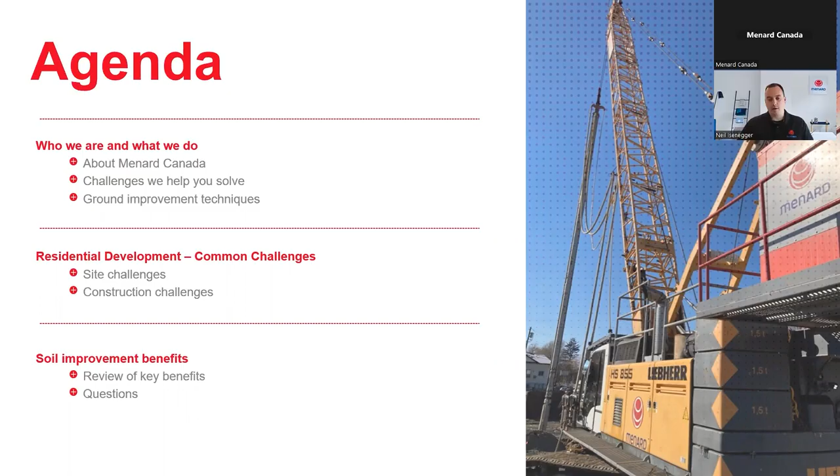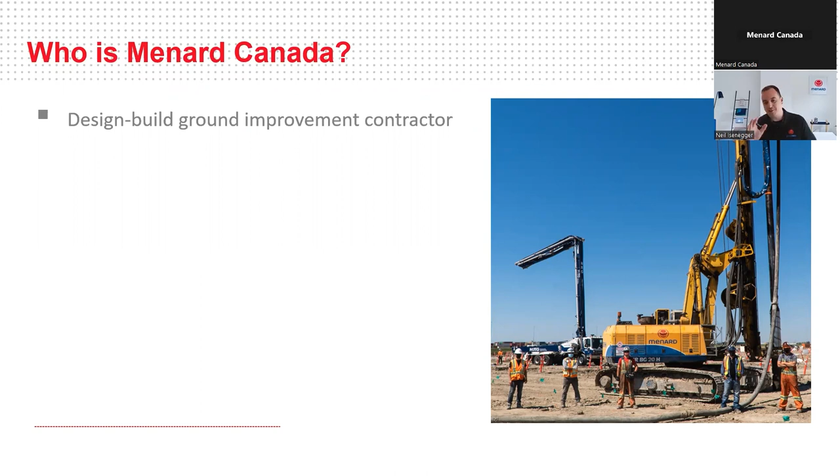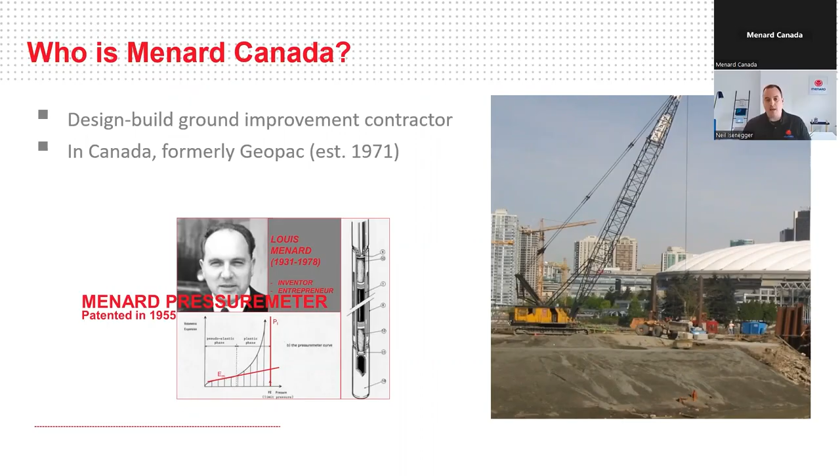So who is Menard Canada? We are a design build ground improvement contractor. If you don't really know what ground improvement is yet, don't worry, we'll get to that in a minute. We've been in Canada 52 plus years now. We formerly operated as Geopac, which was established in 1971 out of Quebec, and they were the first to bring the Menard pressure meter testing method to Canada, which allowed us to more accurately quantify poor soil conditions, how bad they are, get very good data, and look at alternate solutions.

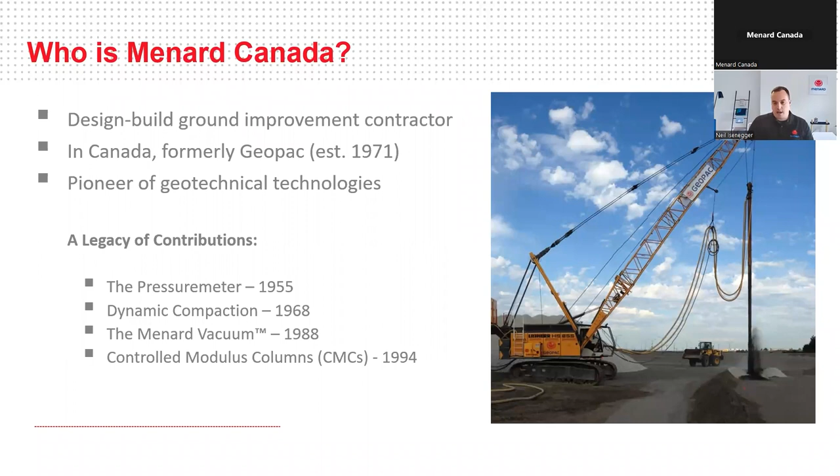...than your typical dig and replace, bulk excavation, and piling type approaches when you get on those sites. We brought a lot of really interesting technologies to the market in Canada. We mentioned the pressure meter. We were, of course, the first to bring in dynamic compaction in the 60s. Menard vacuum, which we won't really touch on today, came in the 80s, and then controlled modulus columns, which we'll end up spending a bit of time on today because it's a very versatile tool in the ground improvement toolkit that allows us to tackle a lot of different challenges.

Menard is established coast to coast across Canada, with offices in Vancouver, Kelowna, Calgary, Hamilton, two offices in Toronto, Ottawa, and Montreal, and we continue to grow. So we've got a lot of good, knowledgeable folks across the country that are able to help you. Please don't hesitate to reach out to them at any time if you have questions after this webinar—someone that may be local to where you're doing your business.

So Menard gets involved in a lot of different projects, and when I was setting up the slides for this webinar, I thought it was interesting that it's going to be a real residential focus for us. It's more about soil conditions than it is application—whether it's a 4-story or 8-story residential building, a storage tank, or an embankment for a new bridge or railway, that just tells us how much stress is going down on the soil. What we really focus on is what these soil conditions are and how we can manage them. But we will talk today about some of the specific soil conditions typical on residential projects, and how working with ground improvement helps simplify that process of construction, particularly in a residential environment.

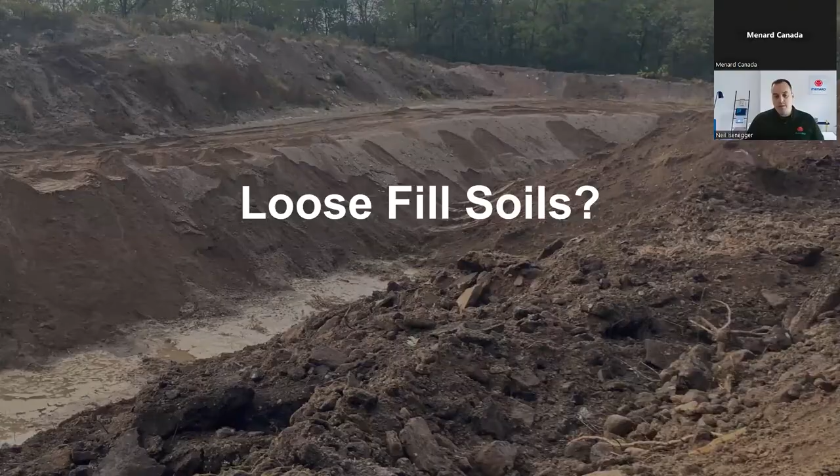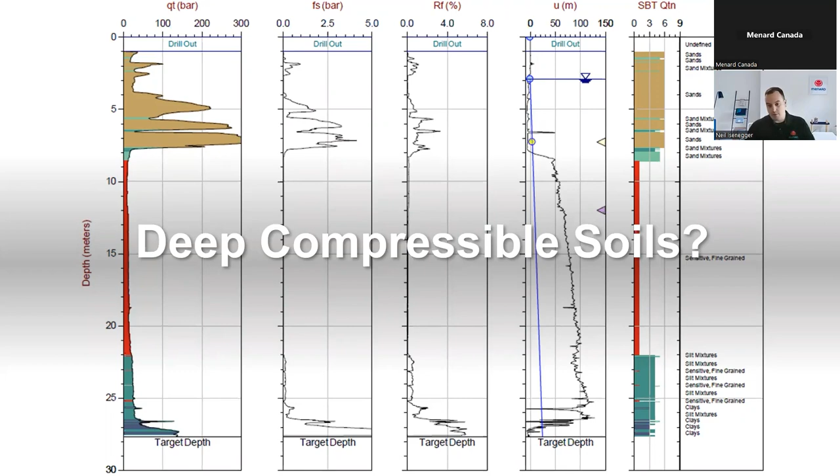These types of sites may have peats and organic soils. You've got to find options to get these buildings out of the ground that don't cost you a fortune and take the entire construction season to implement.

Typically, the options presented to you include things like bulk excavation. So you've got poor soils on the site, dig it out, replace it with engineered fill, bring in import of maybe granular material, sand and gravel, or maybe you're lucky enough to use common earth fill.

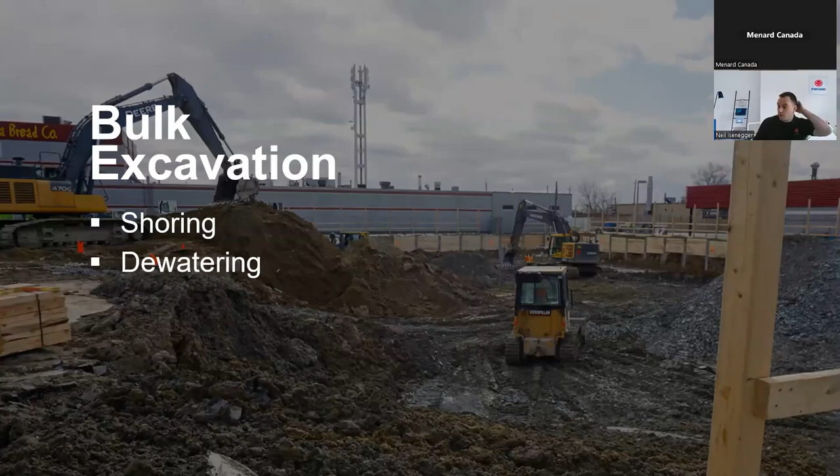Some of the challenges with this approach, depending on where you are on your site, a lot of these residential projects, particularly infill sites, are being built property line to property line. So to remove poor soils, you're likely getting into shoring. You may be getting below the groundwater table, and the soils may extend beyond that level, so you're getting into dewatering.

And then this results in soil disposal, which is costly trucking, and all of this has its associated embodied carbon as well. We'll talk a little bit about the embodied carbon aspects of construction, because I know it's becoming more and more prevalent.

The City of Toronto has recently announced that they're going to cap the embodied carbon on all new city-owned buildings. It's something Menard is working very closely together with our teams across the country to understand - what the embodied carbon of our systems is, how it compares to other systems, and to offer you good metrics on what you can expect in terms of tons equivalent of CO2 per building area, for example. We have an interesting paper coming out later this year that some of you may be interested in, so stay tuned for that.

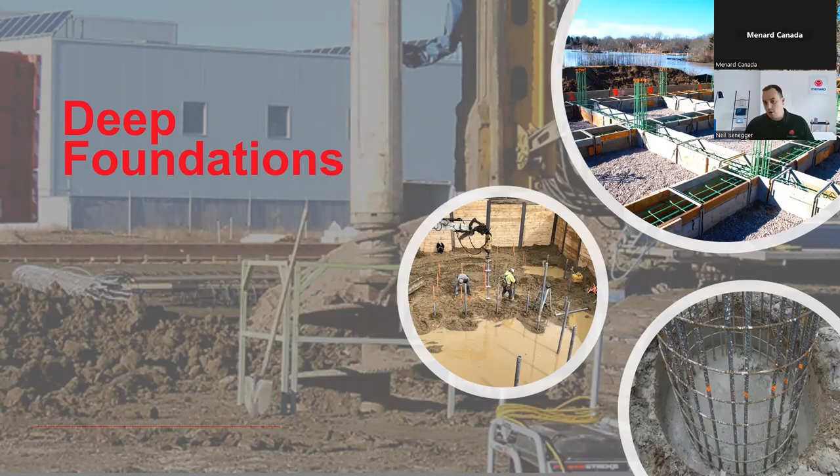The other option you're often given is deep foundations. Certainly with larger residential buildings, you might get into things like caissons or drilled shafts where you're pulling a lot of material out of the site, or it could be helical pile foundations, micro piles, things of this nature.

These are often fairly costly to install. They also require more costly structural systems - pile caps, grade beams, tie beams, structural floor slabs - which complicate and add to the expense of these projects. And then, as we're focusing on that embodied carbon, it's a real kick to the project from that standpoint.

Obviously, everyone would like to be at high capacity, shallow foundations - this is strip and spread footings. A number of reasons for that: they use less excavation required, so you're generating less excess soil to manage, fewer materials, so less concrete, less rebar.

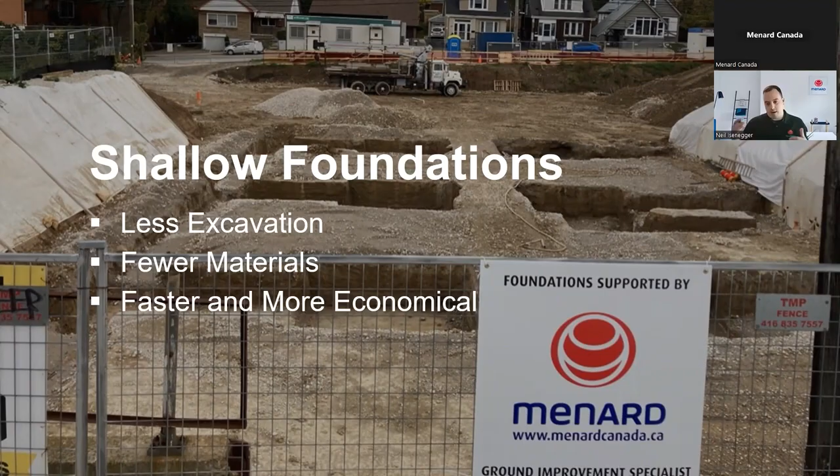These are often faster and more economical to construct in the field as well. Lots of folks are very familiar with this. As you get into pile caps and grade beams, you may need more sophisticated site trades to tie that rebar and do a good job of constructing those elements. And shallow foundations, of course, have a lower impact on the project in terms of carbon, emissions, and material use.

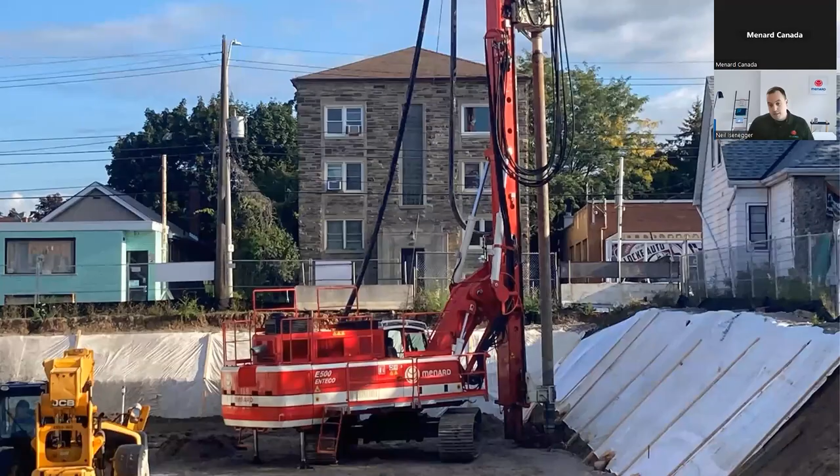So this is a site here you see in the background of this slide. You can get a sense of some of the size of these pad footings. This is a project that was completed a couple of years ago by the Menard team here in Hamilton. You can see ground improvement being installed very close to existing buildings, right next to an existing slope.

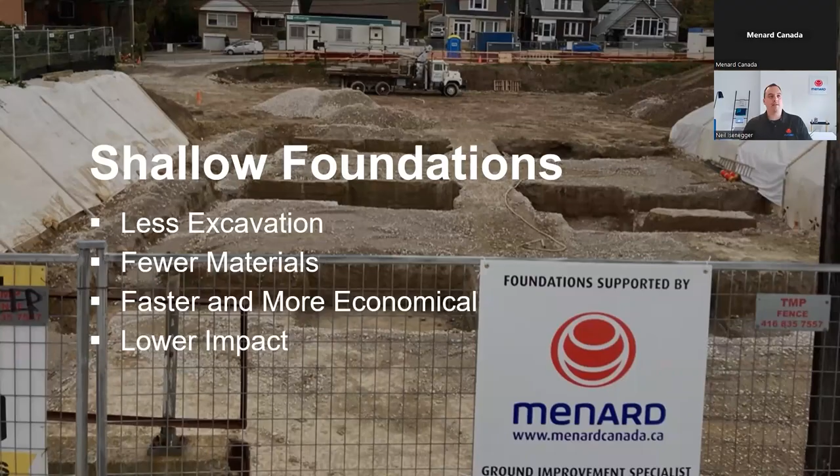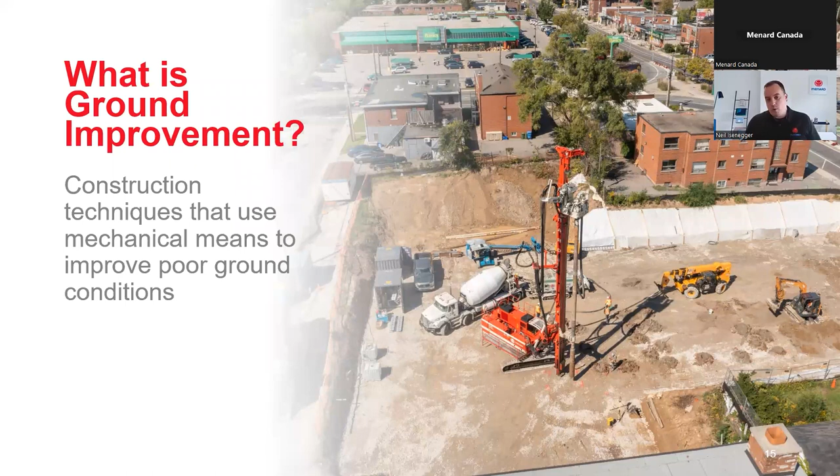So what is ground improvement, you might be asking? Ground improvement is sort of a catch-all name for a bunch of different technologies that use mechanical means to improve poor soil conditions. There's a bunch of different approaches that can be taken, sometimes in combination with each other, to make a site workable for construction - helping get you from dirt to doorstep with these residential developments.

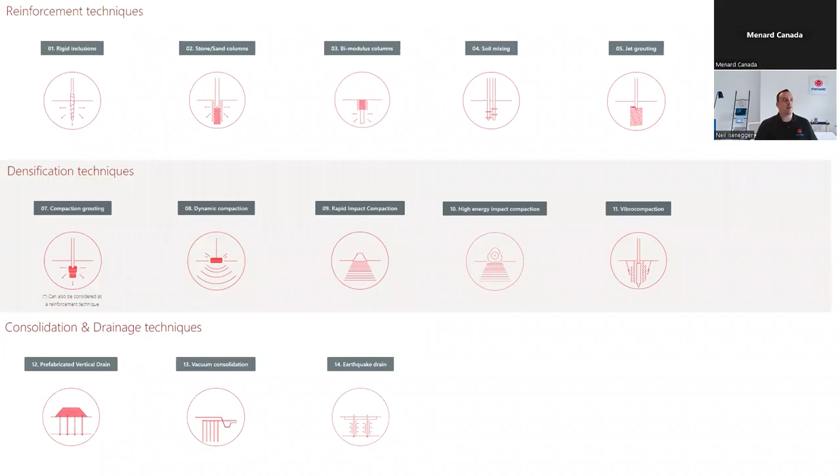Some of the more common techniques that we're seeing in Canada and utilizing on projects include soil densification - the number of different ways we apply either impact energy or vibratory energy to the soil to densify it, tighten the site up, give it higher bearing capacity, control settlements, and manage liquefaction risk. Our team on the West Coast is certainly dealing with a lot of liquefaction-related vibro compaction, for example, which is what you see on the far right here.

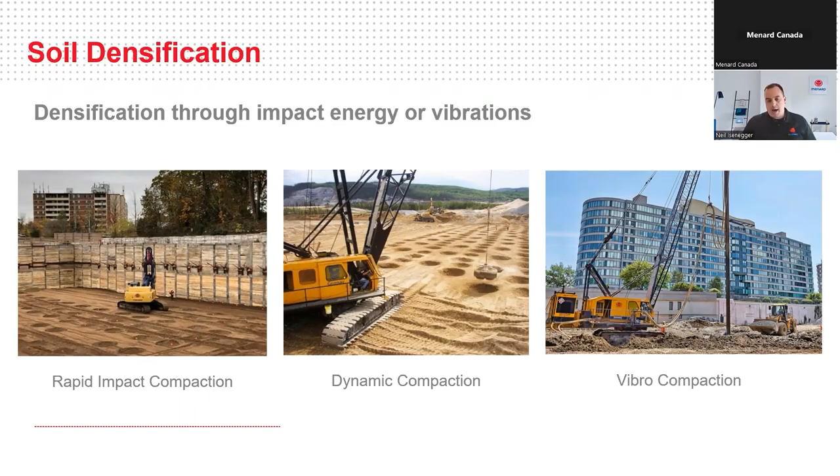With these techniques, you're generally not adding any materials to the site. You're simply using energy to densify the soils. That works up to a certain limit. Beyond those limits, you start adding materials into the process.

You can use aggregate as a somewhat common approach. You can see here a number of different installation methods for installing a vibro stone column or an aggregate pier - techniques suitable for treating 30 meters, 100 feet of poor soils, maybe 15 meters, and then smaller equipment for smaller projects. The goal here is to bring the right piece of equipment to a job site, no bigger than you need, from a number of standpoints - obviously costs, but in terms of its environmental impact as well.

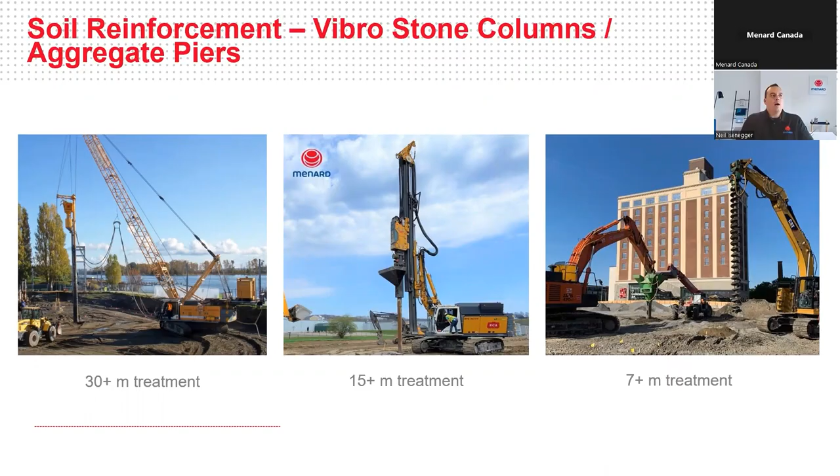There are certainly some limitations when you get into aggregate-based ground improvement, and a lot of those can be overcome with concrete-based ground improvement methods - controlled modulus columns. You see again a number of different sizes and setups of equipment, everything from very large rigs that go 30 meters plus on sites, to more mobile rigs in the 20-meter range, 15-meter range, and it gets smaller and smaller from there.

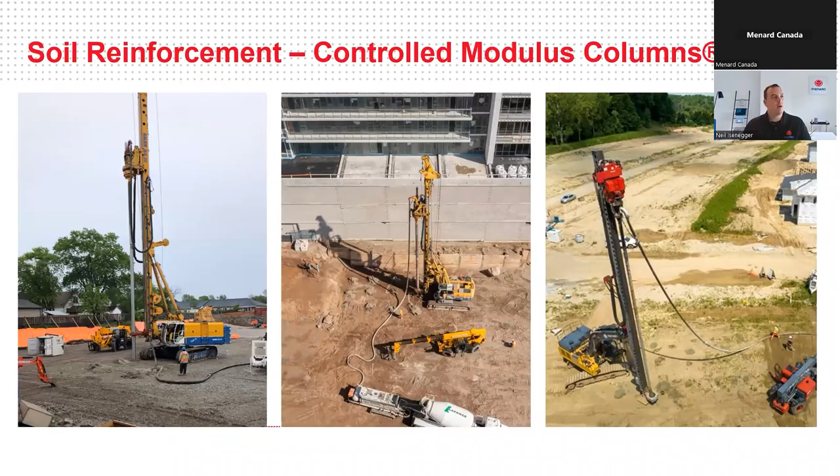Why would you even start the conversation of considering ground improvement? Well, when you're dealing with challenging soils on your site, really what your main concern is settlement - total settlement of buildings, roadways, services, and differential settlement within structures causing cracking, and all sorts of issues associated with that. Ground improvement is an engineered settlement control system. That's where it all starts - it starts with settlement performance, and then the structural systems back out of that.

We're able to increase the bearing capacity of a site. You might have a site where your geotechnical engineer won't provide any bearing capacity because you're in undocumented fill or very poor soils. We can work that site, give you reasonably high bearing capacities to build off of, and help manage long-term deformation - because certainly you can put a structure up, but 10, 15, 20 years down the line, how is it performing? And then in seismic events there are risks that the soils may liquefy and cause settlement of structures, and there are ways we work to mitigate that as well.

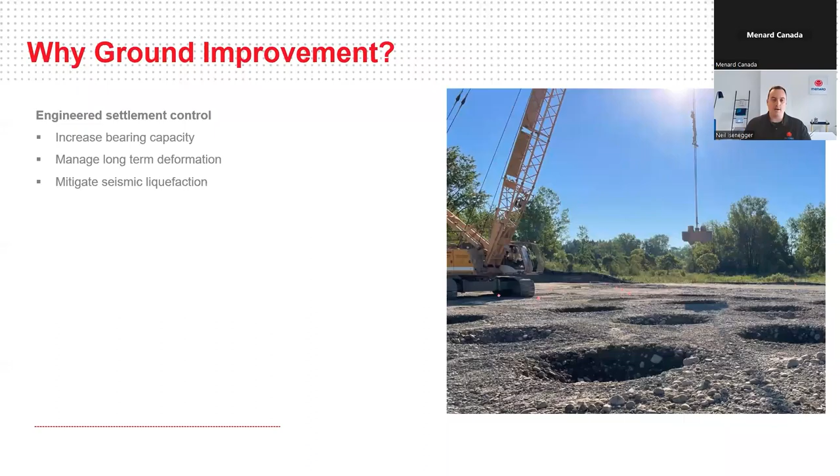From a construction standpoint, I think one of the main reasons our clients like working with ground improvement is it simplifies the construction process. We're significantly reducing the amount of excess soil handling and disposal that needs to be done. So if you've got 2-3 meters of undocumented fill on site and you need to find a home for that, it's becoming more difficult to relocate those soils. Certainly here in Ontario with the latest excess soil regulations, that's complicating things. If you can leave it in place, densify and reinforce it, there are significant reductions.

Going back to standard foundations and floor slabs - these also move faster in the field because they're easier to construct and have less materials. Some of the other benefits: if you're building a residential townhome or single family home, the end user may decide one day they don't like where you put the bathroom - maybe they want it on the other side of the house, or want to move some servicing around. If you're in a structural floor slab system, that's very difficult to do. Ground improvement, allowing for standard floor slabs in those cases, gives a lot more flexibility for future modifications to these structures.

And then, of course, there's time and cost associated with every kind of technique. Some of these big bulk excavation and earthworks operations take a lot of time and cost a lot of money, and you can be a lot faster and more economical, often with ground improvement techniques.

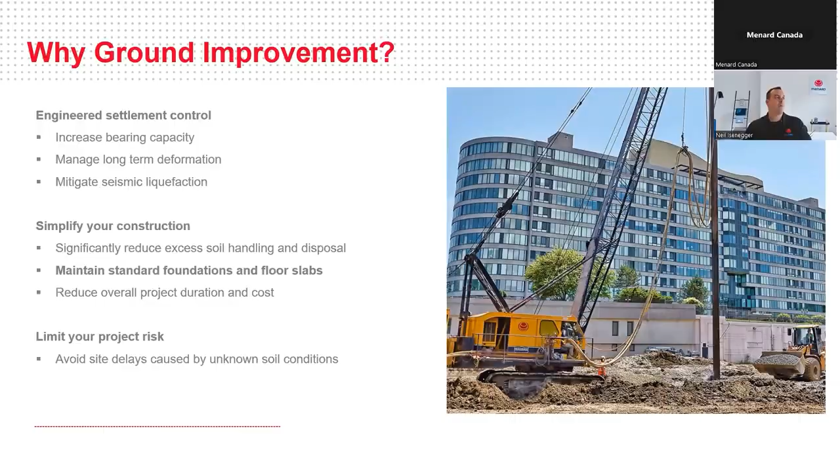So a bit of an overview - we'll dive into some residential developments, and then some of the common challenges that our clients are often faced with, and that we help them out with.

When it comes to residential, this might not be the exact right headings for all these types of projects, because we'll talk about subdivisions and low rise, and technically they're all low rise developments, but they are a little bit different in how they're executed.

Subdivisions, whether single family homes or townhomes, are often large sites in terms of area, and then have relatively light structures placed on them. But when you have soil challenges on large sites like this, the costs and duration start to escalate because you're dealing with such a large area.

Digging up a meter of coarse soils on an infill site downtown may not be a huge impact to the site, but digging a meter off a large development area is going to start generating a lot of soils, take a lot of time, and certainly be a lot costly. So with subdivisions, that's one of the main differences from other developments - just the actual area these projects are on.

They also often include a lot of things like roadways, a lot more utilities and servicing than what you're dealing with on maybe a couple low rise or mid rise developments on the project.

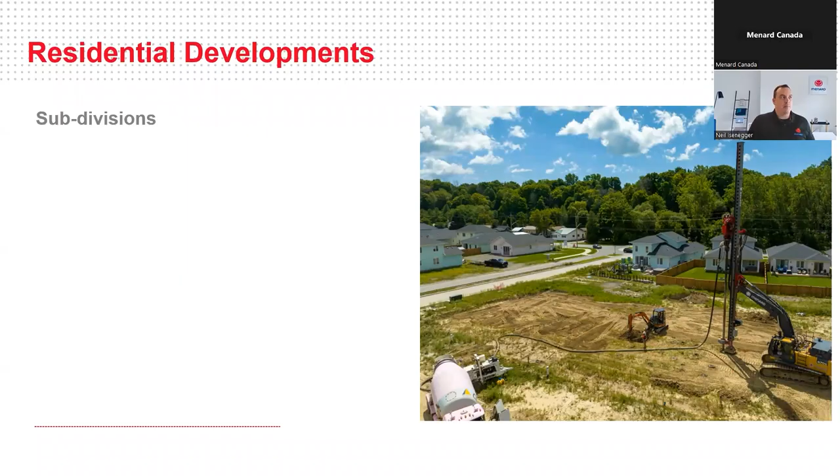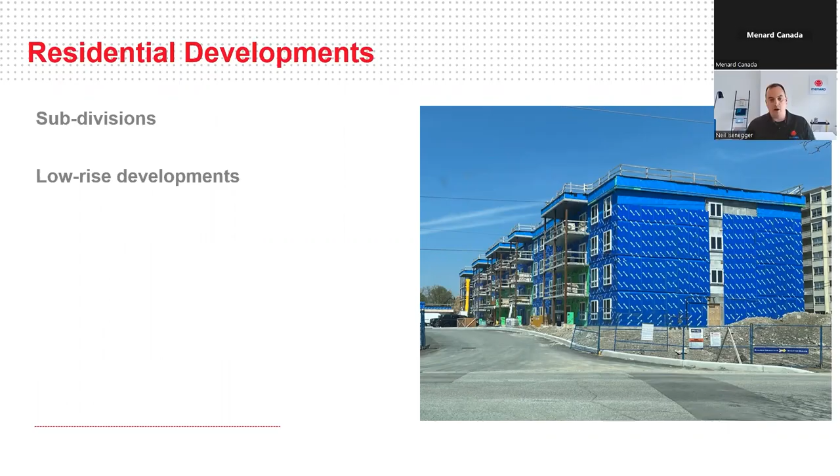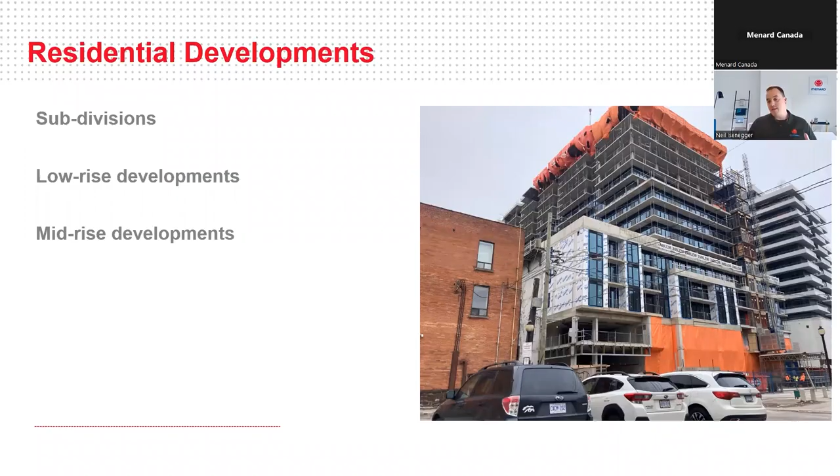As you get into mid-rise developments - and all these photos are projects supported by Menard - you get a lot more stress. Typically smaller areas means you need that high bearing capacity to control settlement and make your foundations work. As the number of stories increases, we might be moving away from strip and spread footings, possibly into raft foundations, depending on soil conditions. So there's a distinct difference between mid-rise and low-rise development.

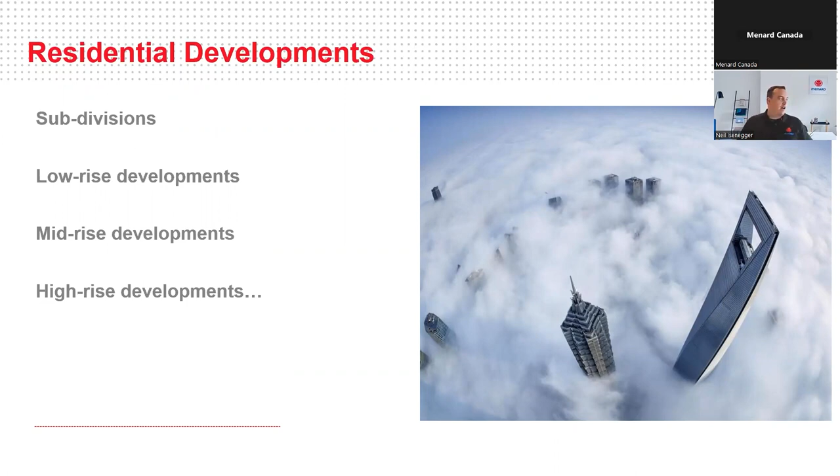Then high-rise - if you're developing a lot of high rise, anything over like 20-25 stories, you might be in the wrong webinar. Ground improvement, it's not piles - we're not doing the 55-story towers downtown Vancouver, downtown Montreal, downtown Toronto. Really, we're focusing on this low to mid-rise development where we can offer a lot of value, and these techniques seem to work quite well.

So what are some of the common challenges on residential development? Besides permits and approvals, labor shortages, material shortages, pandemics, and all the other challenges folks have to deal with, a lot of these sites being developed - maybe they're leftover sites, maybe they're leftover sites for a reason.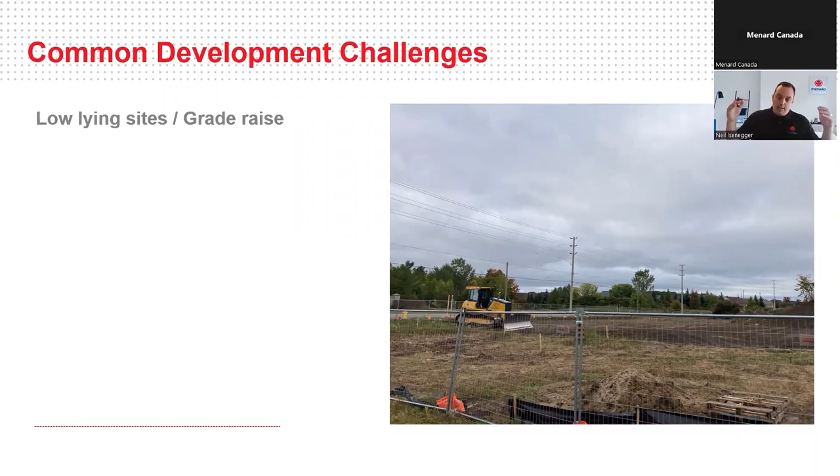They may be low-lying sites. They may require additional fill material, a grade raise placed to get them up to their final elevations to manage civil requirements, drainage, servicing. That placement of new load on the site can be a challenge, and we'll talk about some examples of that in a minute.

Brownfield sites - there's been former land uses, and these may have impacted soils. We'll talk about some techniques for dealing specifically with brownfield sites.

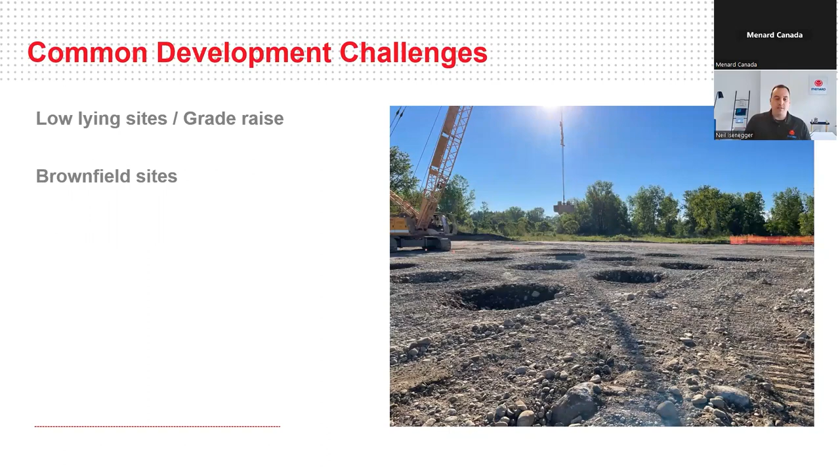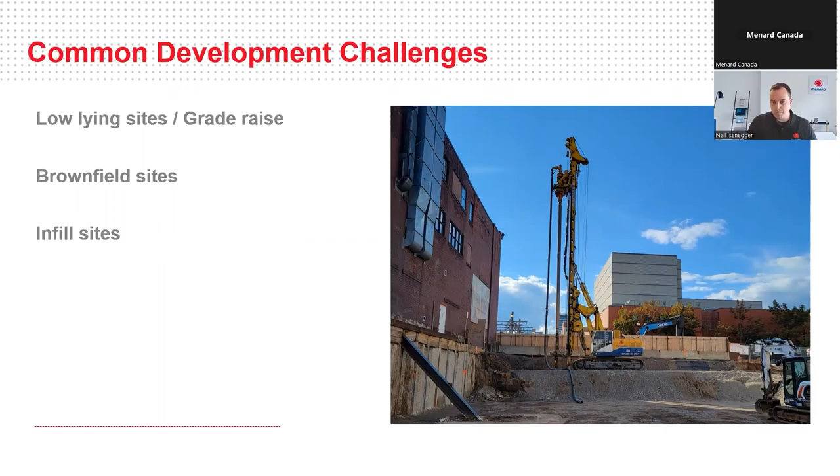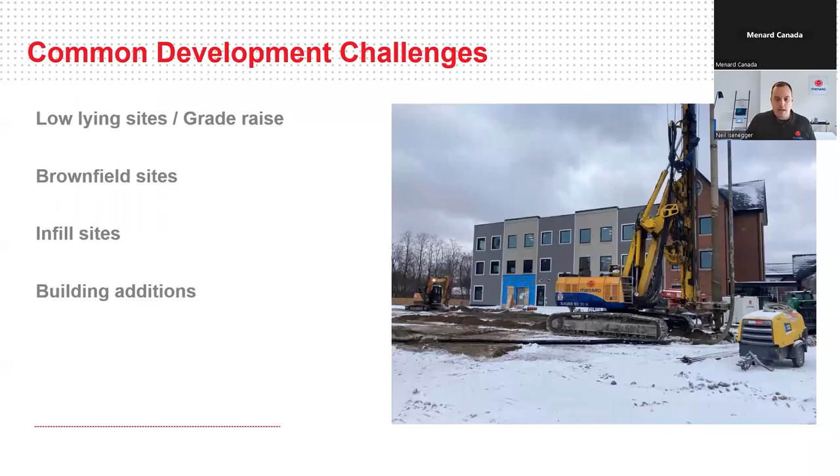Infill sites are another type of development. A lot of this is common, but what's changing is the environment you're in. We've got some interesting comments particularly on infill sites, and how to manage that without upsetting your neighbors, which is really the same as building addition projects as well, which we do a number of.

This can complicate your site. It can complicate where you want to put your foundations. It can complicate what you need to do in terms of earthworks to actually make the site buildable. There are ground improvement strategies that can help manage high groundwater conditions. And then the other one we mentioned previously is seismic liquefaction - earthquake events shaking the ground, losing its strength, and causing settlement of these structures.

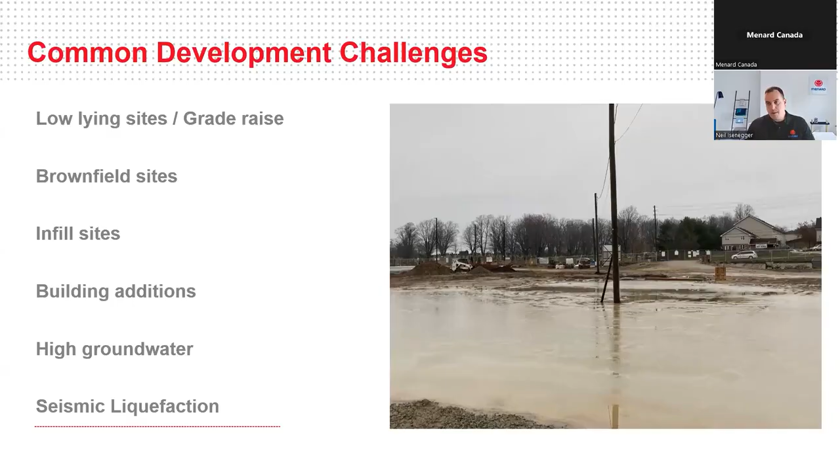So one example of a project completed by our team out west - this one's in Kelowna, BC. It's a large mixed-use residential development, also had some cool stuff going on with it in terms of boat storage facilities and clubhouses for this boat club. But the site had 20 meters of loose sands that were at risk of liquefying during earthquake events.

It also had low capacity, and you can see here vibro compaction being used to densify that soil, mitigate that liquefaction risk, and provide a higher bearing capacity - shrinking down the footings, sticking with standard foundations, and helping to get that site up out of the ground without the expense of driven piles, pile caps, grade beams, and structural slabs.

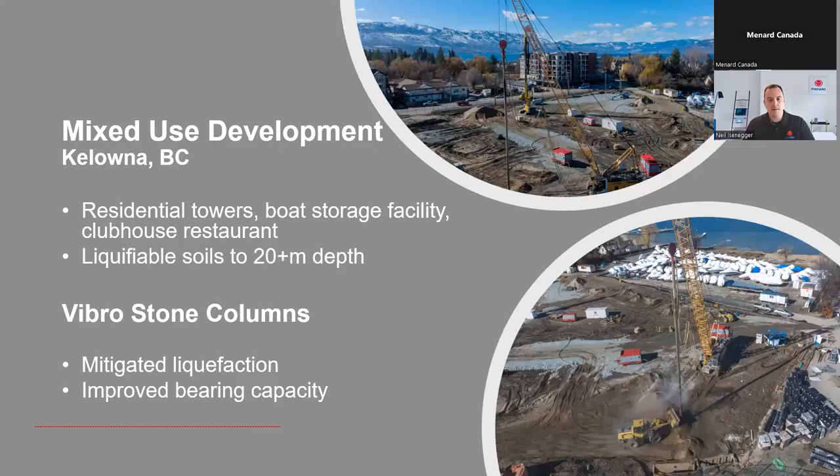We mentioned already with subdivisions, these are typically lighter structures. They often have the intent to have minimal foundation requirements - production units, trench and pour techniques, for example. Folks really like that, where they can get the foundations in as fast as possible. And they really prefer conventional floor slabs, as we talked about, in terms of the ease for future modification, but of course also the cost of installation.

These sites, having a lot of site servicing and roadways as well, often lend themselves to ground improvement techniques that can allow you to globally treat a site. We mentioned techniques like aggregate-based techniques and concrete-based techniques - those are most commonly installed discretely underneath foundation elements, underneath slab elements. But techniques like dynamic compaction, vibro compaction, another technique we'll mention here in a minute, allow you to treat the entire site. So you're not only dealing with the foundations and the floor slab, but you're dealing with the driveway and the backyard and the servicing that's coming into the building and the long-term performance of the roadways. And that can be very effective on these kinds of larger sites that may have larger earthworks operations.

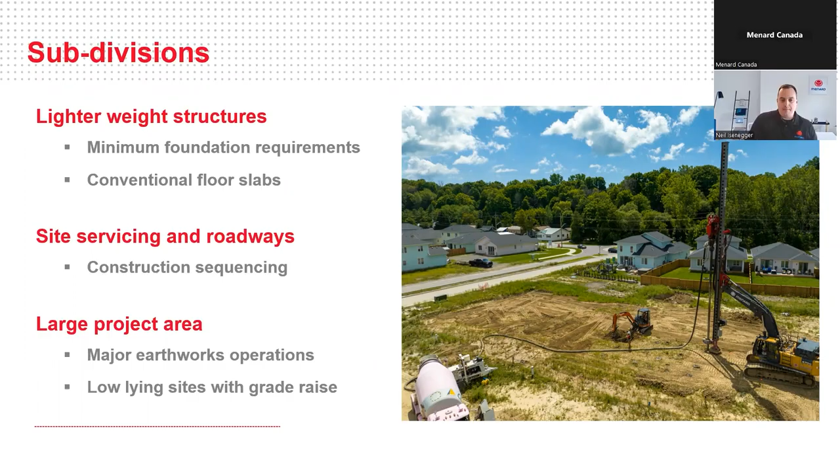So this would be an example here of this discrete support, like we talked about. There are a number of projects we're completing all across Canada that are single-family homes, townhomes. We do a lot of this work with concrete-based systems because they're generally the fastest to install and the lowest cost compared to say aggregate piers.

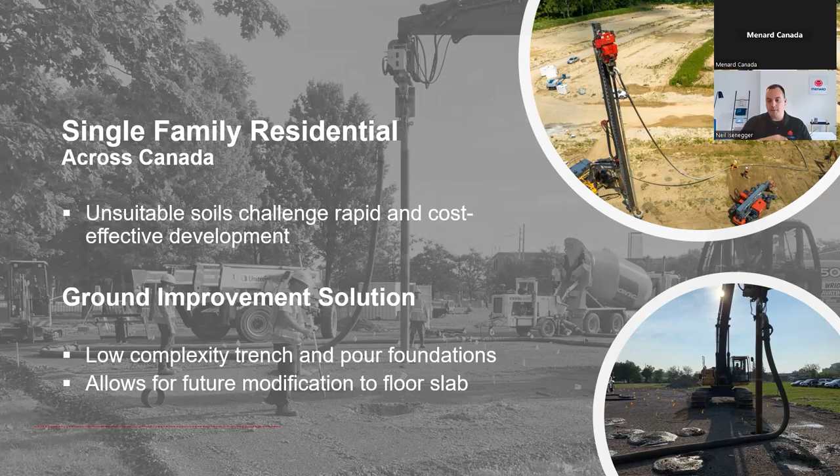We're often in situations where maybe some of the vibrations associated with dynamic compaction might not be suitable when you're in residential neighborhoods. These techniques are very low to no vibration, so keeping your neighbors happy, not damaging existing structures that may be next door - pools, existing buildings. And then they allow again for that low complexity trench and pour foundation system. So a lot of work with controlled modulus columns, using a bunch of different setups, as you see here, from very small equipment to larger equipment to manage these types of projects.

This particular site - this is a subdivision in Keswick, Ontario, and for those who don't know the area, it's just south of Lake Simcoe, but it's very soft soil conditions. The area is known for very poor soil conditions and having issues with long-term settlements. The developer was looking to build a number of single-family homes, and 17 units were being placed on this site, but they were challenged with about 20 meters of deep compressible clays. The concern there is that you put the foundations, you put these houses up, and then as the years go by, you start to get shifting and settling of the buildings, and they become unsuitable for occupancy.

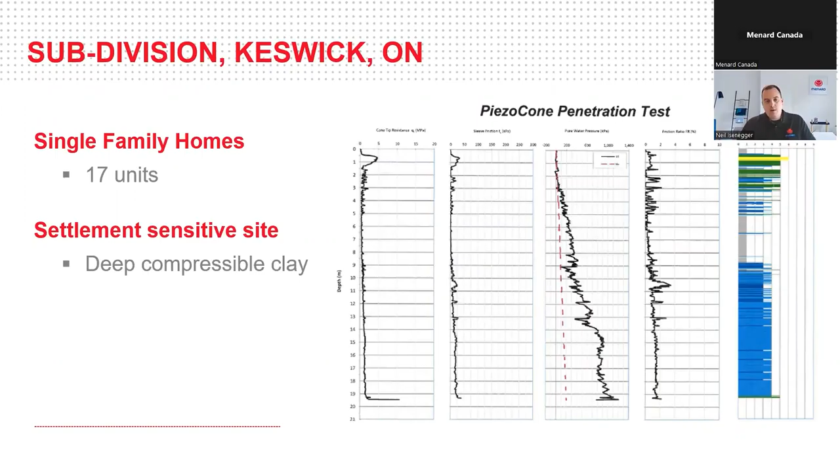We took a pretty interesting approach on this site using a combination of what we call wick drains and preloading. I'll show you an animation of this in a second, which I think will give a lot of context. But the idea here is that when you're placing new load on compressible clays, that settlement happens over time because the water within that soil goes under pressure under new load. And as that pressure dissipates, the settlement occurs.

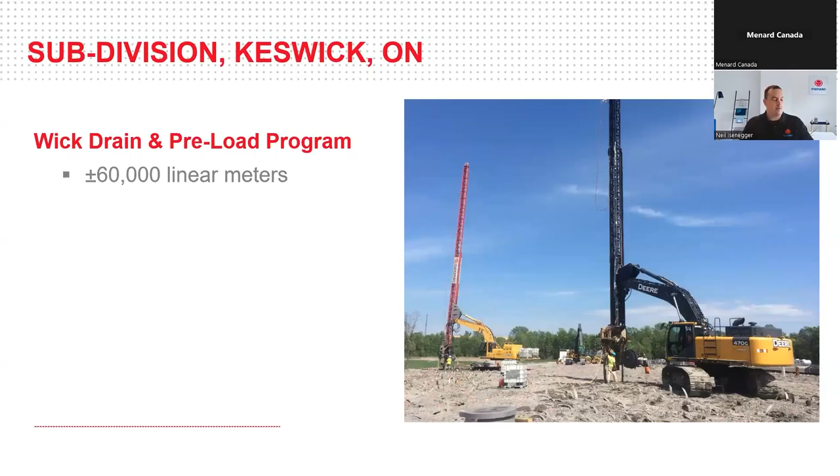So if you can dissipate the pressure rapidly, say in 2-3 months, you can avoid the risk of long-term settlement. This site used about 60,000 linear meters of vertical drains to relieve the pressure, and then placed anywhere from 2 to 3 meters of new fill over top of these units, so that the weight of that new fill was driving out that settlement in a matter of a couple months. It was then able to be removed, and the houses were put down afterwards, and are performing very well today.

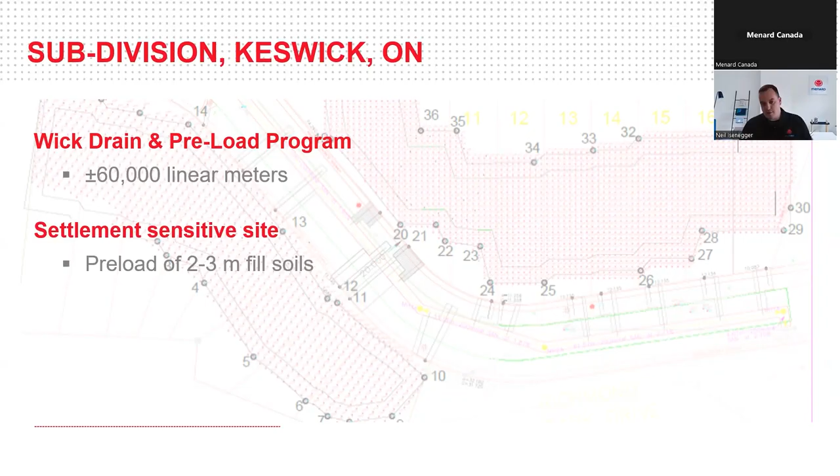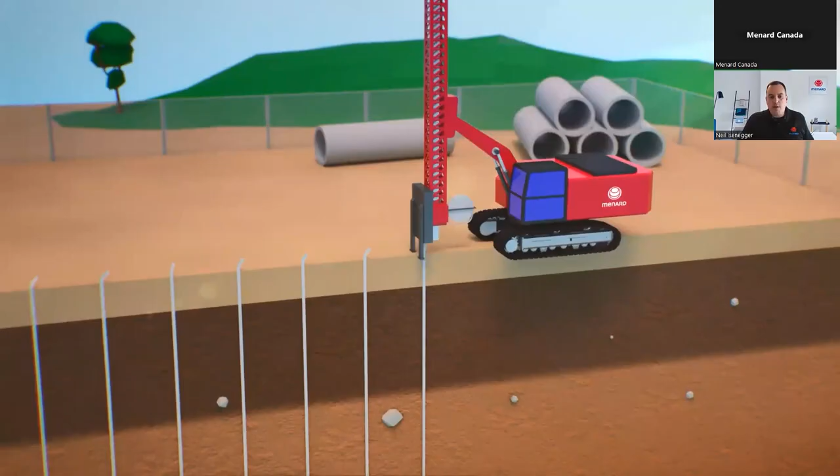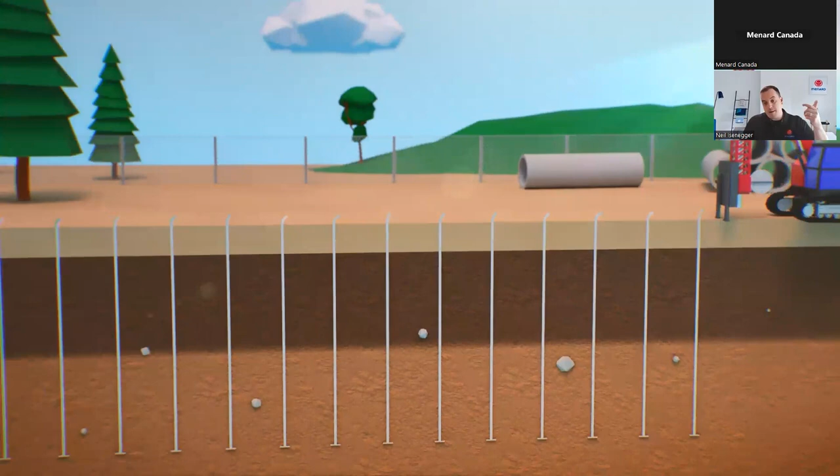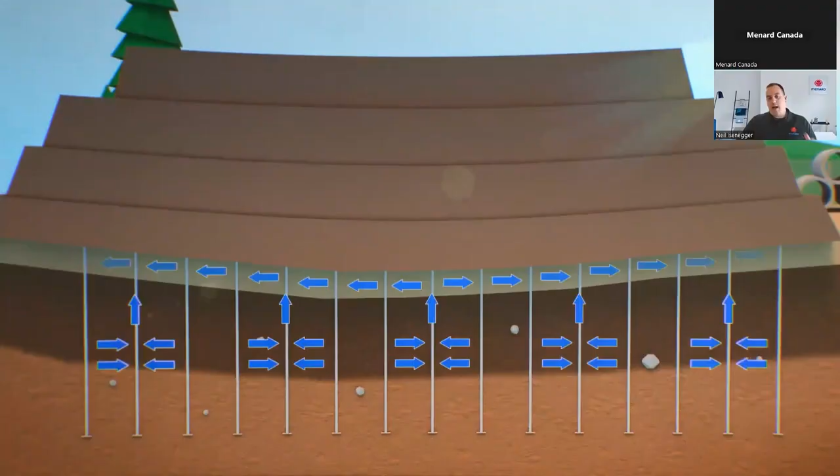So this is a quick animation of the process. I hope it's not too choppy coming through virtually here, but what you can see is a high mast excavator rig stitching in these drainage elements. They're prefabricated - like a plastic core wrapped in a filter fabric. And then as you place the new load, that spacing of the drains allows for the rapid relief of the buildup of pore pressure and causes that settlement to occur rapidly, as opposed to years or decades down the line. That can be incredibly cost effective.

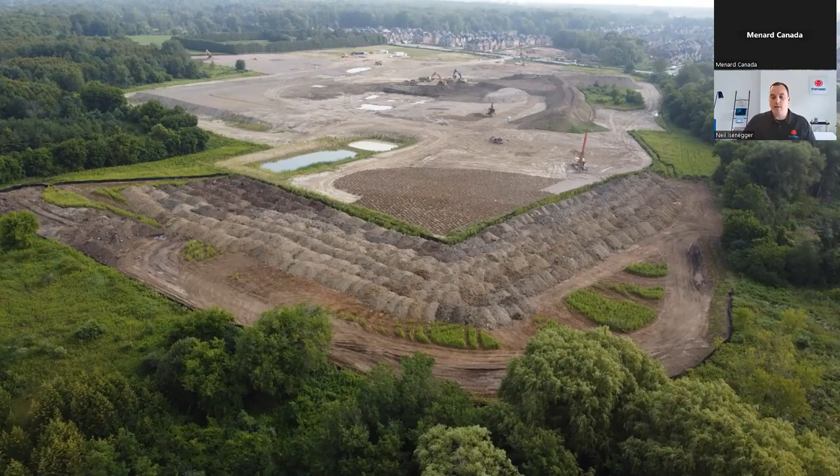When it comes to brownfield sites, I think the most common challenge is, what was there before and what did they do with the property? There could be fills that were placed in an uncontrolled or at least undocumented manner. There may be environmental contamination. There may be concerns about buried artifacts on the site, whether it's tanks, old foundations, etc., that you may or may not be aware of. All of this typically means you're doing a fair bit of earthworks and remediation work to get the site ready. You're likely generating a bunch of soil that's unsuitable for reuse as backfill, and it may be quite costly to remove from site. All of that has a real impact on the project schedule, cost, and duration.

So if you can take those sites and de-risk the underground with dynamic compaction, as we're showing here in the photo, vibratory compaction, aggregate piers, or controlled modulus columns, fix the site before you develop, find and manage any of those issues without putting shovels in the ground, you can really get ahead on these sites. When you start digging, you often start finding a lot of problems, and the more you have to dig, the more problems you're liable to find. So we like to minimize the amount of soil you need to manage, minimize the digging - only dig as much as you have to - and get these sites built so they can get to market.

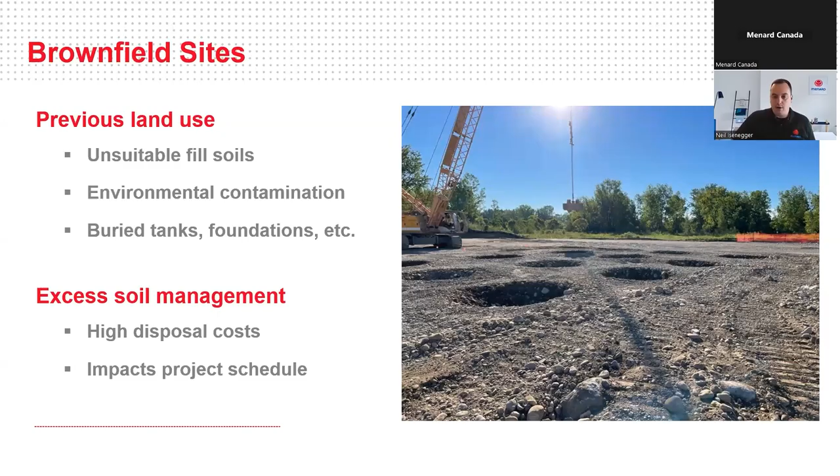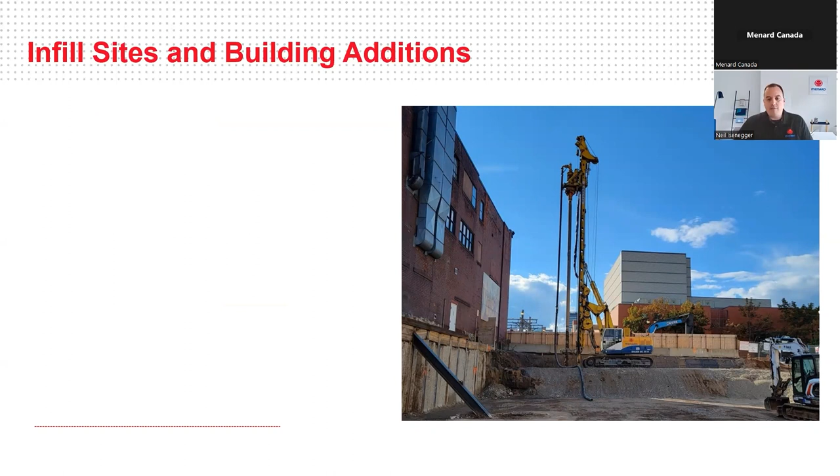We kind of combine infill sites and building additions because they have some very similar challenges. Often what we find on these sites is it's really about access and tight working conditions. They might have minimal material storage, for example, and using the right type of equipment makes a lot of sense. Here we show a concrete-based controlled modulus column ground improvement system where the material is being brought in every half hour, every hour, in a concrete truck. So it comes, it offloads, and it leaves. We're not having to stockpile 1,000 cubic meters of gravel somewhere to keep up with production for, say, aggregate piers.

You're definitely next to existing buildings, so you're not going to do dynamic compaction - the vibration levels are going to be too high. So using systems like controlled modulus columns that have no vibration, are relatively quiet, and require minimal material storage can be a real winner on these sites. And of course, being zero vibration, they have very little impact on adjacent structures and shoring, for example, as well - we'll talk about the building in the background here in a second.

And then vibrations - we mentioned vibrations. There's two types really, the way I see it: damaging vibrations, and then perceived vibrations. The human body is very receptive to vibrations. A lot of neighbors in the community, when they feel vibrations, start thinking the worst about their foundations and their property. Whether what you're doing on site is actually going to cause issues or not, that perceived issue results in a lot of complaints, taking time away from your site super who has to deal with these people and their concerns.

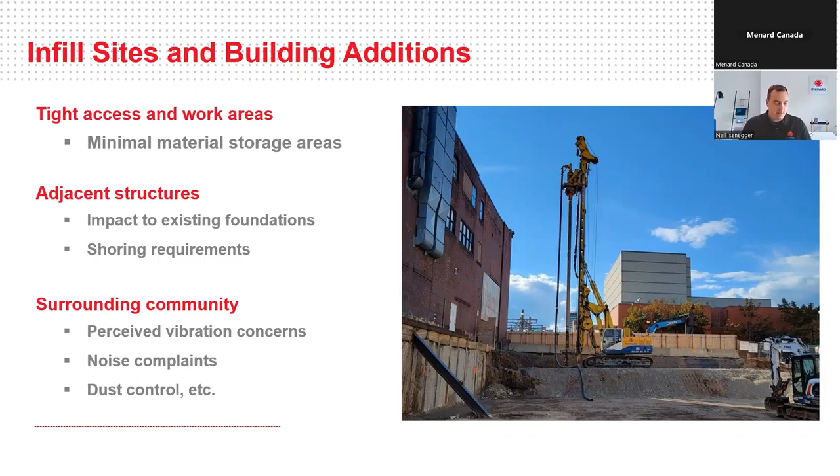One of these sites is the 15-story mixed-use building here where I am in Hamilton. This site had maybe 5 to 8 meters of impacted fill, weak native soils, high groundwater conditions. There's an adjacent historic structure, a new building on the other side - a lot of challenges in that regard.

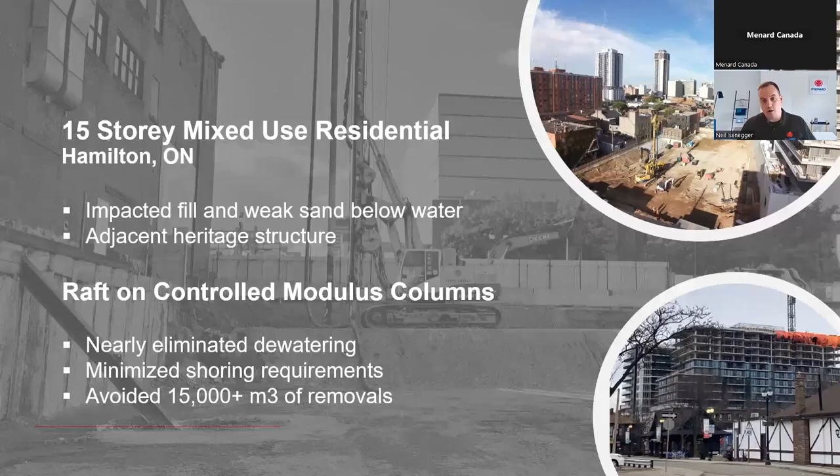Controlled modulus columns on this site were used to support the development. They were installed right up against the heritage building without any issue, and greatly reduced the requirements for shoring. If you cut 5 to 8 meters of shoring off your site, plus removal of all that spoil and the dewatering, that's significant time and cost to the project - eliminated by reinforcing the soil from the underside of what was a raft foundation without ever getting in. We stayed about half a meter above the groundwater at all times.

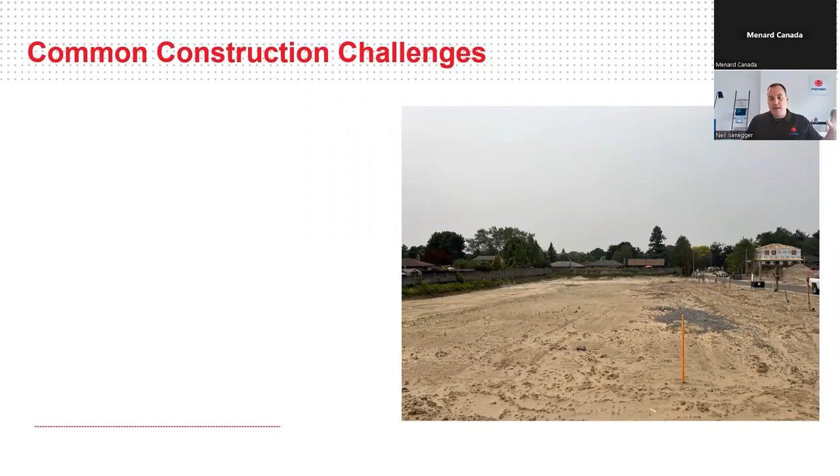So talking about some common construction challenges now - those are the site-related challenges. We're all familiar with the soil-related challenges, but when you actually get up to construction, what we like to work with our clients on is things like sequencing of work.

Especially if you're on a low-lying site that might have compressible soils and you need to raise grade, that grade raise is going to cause settlement. When do you put in your utilities? When do you put in your roadways? When do you do the ground improvement work? When do you do the grade raise? Do you do the grade raise first and then reinforce it after, or do you do the ground improvement first and support the grade raise directly?

A lot of this conversation is really about working with the clients, understanding the schedule and the objectives of the project, because every project's a little bit different. Some folks have time to wait, and when you have time to wait, you might have more options available to you. Sometimes folks need to just build - they need the ground improvement done, want a forming crew coming in a few days later - and that changes how we might approach a project.

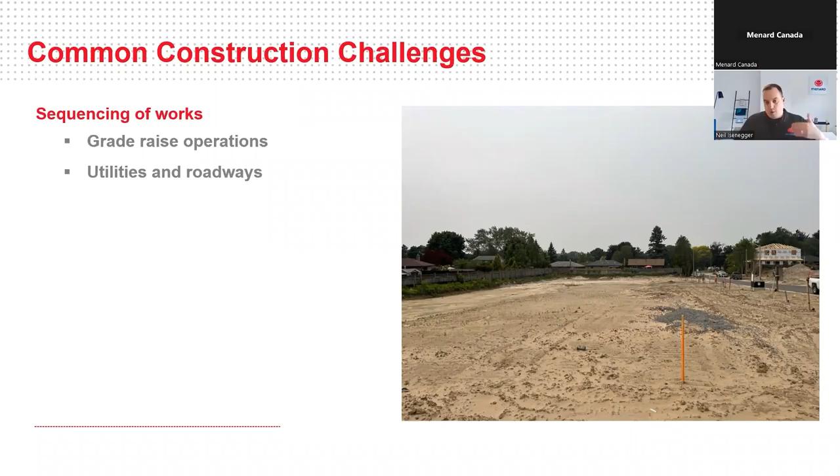Things like vertical wick drains, like we showed earlier, do require some time to consolidate that site and drive that settlement out. That may not be applicable if you don't have the time to wait, and you might get more into soil reinforcement with aggregate, or most commonly with concrete, to support grade raise directly, support utilities directly, in foundations.

Schedule certainty is a big challenge - this is about delays. When you have unknown conditions on site and you start digging, and if your plan is bulk excavation, there's a lot of unknowns. Those unknowns may result in extra cost, because if you're moving more volume of soil off site than anticipated, there's obviously a cost to that. But then there's also a duration to that - not just the duration of the earthworks, but what that extended duration does to the rest of the project.

You delay a project by 2, 3, 4 weeks, maybe managing poor soil conditions, and that falls all the way down the line on your schedule when you're trying to line up trades closely together so you can get your projects out of the ground as fast as possible. This can cause major hangups. Of course, when you start digging and get into groundwater conditions that are unmanaged, that's major delays to the schedule.

And that goes all the way down the line, to the person at the end of the day who might be putting on the doorknobs and installing windows, who maybe planned for your project for a certain time and now it's being pushed out. Maybe they do or do not have the capacity to manage it at that time, and it really complicates the process. Dealing with that up front with ground improvement, reinforcing the site so that when you get down to the founding elevation, you're just putting your footings in, that can save a lot of headache on the duration of these projects. And then cost control.

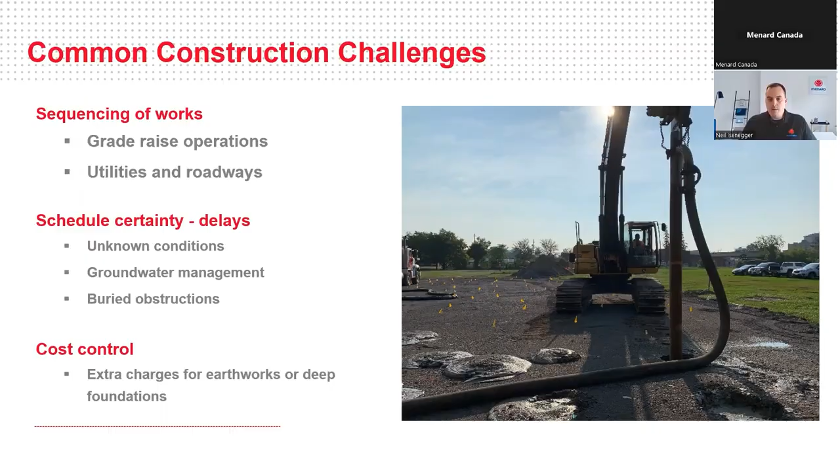So we'll wrap this section up with just an overview of some of the proven benefits of ground improvement. This is really specific to a lot of different projects, but I think residential has its own unique challenges here.

Again, the first one, and where it all starts from, is settlement control. With engineered settlement control, you get the immediate and long-term performance of these structures, which allows you to build on some of these sites which may otherwise have been unsuitable or very costly to construct. Maintaining those standard footings, maintaining that standard floor slab again moves faster in the field and helps you get to that trench and pour if you're that sort of low-rise residential contractor.

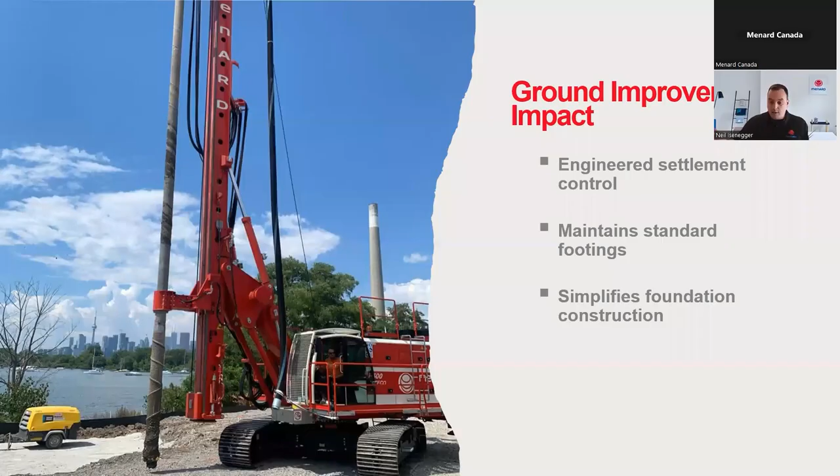Avoiding all the rebar tying, pile caps, grade beams, like we mentioned before, is all about simplifying the construction, which allows you to rapidly execute the construction of these units once you finally get through the permits and approvals process and it's time to actually get these things built.

By leaving the soil in place, this avoids a lot of headaches. Whether it's excess soil management, whether it's regulations in Ontario or extra costs per cubic meter to move dirt in Quebec, there's dealing with soil. The more you have to handle and deal with soil, the more cost, the more duration, and the less control that you have on projects. And if we can simplify that by just densifying or reinforcing that soil in place, there's major benefits to the project. And then, of course, that comes with the schedule certainty and the cost certainty that we discussed already.